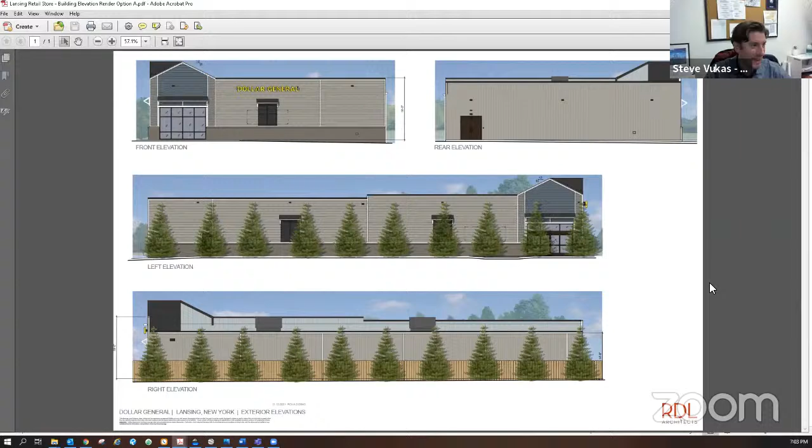Our applicant's kind of funny. They're not a big fan of the blue, they just don't want the whole main portion blue. So they can do like this corner, but not the main portion, on option A.

I don't know about the rest of you, but I've seen enough brown and tan dollar stores. I thought that was more of a gray than a blue. The brown and tan blends in with the neighborhood. It's less outstanding.

I like A. Honestly, I think blue is really pretty. Is that the one with the blue? The last one, I'm gonna go to C and then I'm gonna switch back to A.

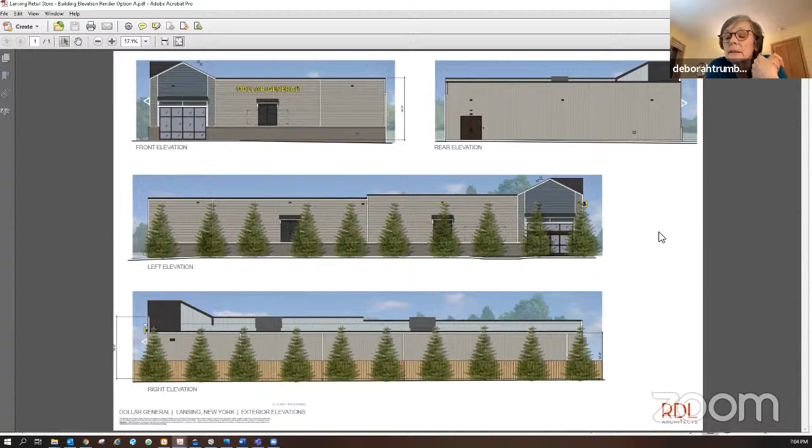So A is like the one in North Lansing. I think it's way more attractive than the tan and brown, but that's my opinion. I agree, it looks really aesthetically pleasing. And I think that's classic, it won't get old over time, compared to the other two.

Okay, sounds like majority of the members are for A. Anyone else want to speak up for or against? All right, I think A is the preference here, if that's all right. I believe that works.

Okay, anything else about the design? The site improvements, anything else, board members? Steve, is that supposed to be indicative of what the screening will look like on the roof?

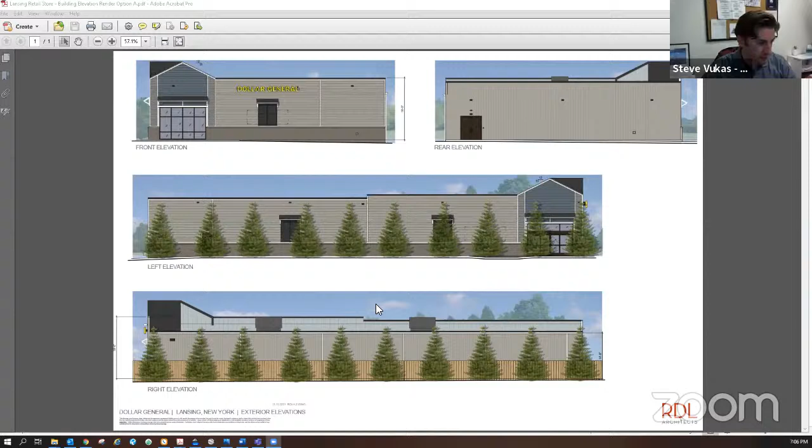Let me share my screen again, I'll show you. So this was option A, this is without the screens. You can see, I don't know if you can see my cursor, that's the HVAC units. I didn't update, or the architects didn't update option A, but I'll show you in option B and C the screening - they extend the panels up to just block those top units.

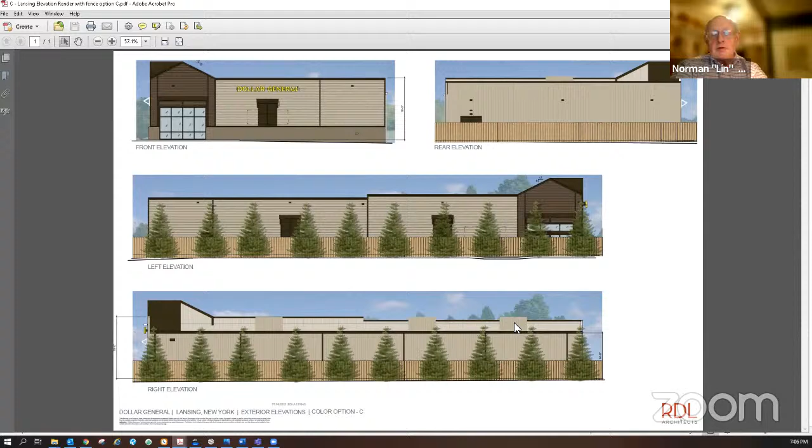So looking at it from the side, you can look behind the panel. Possibly, yeah, I don't know how much wider it extends past it to the left or the right of it. You're gonna have to be in somebody else's backyard to see it. Yeah, up the hill.

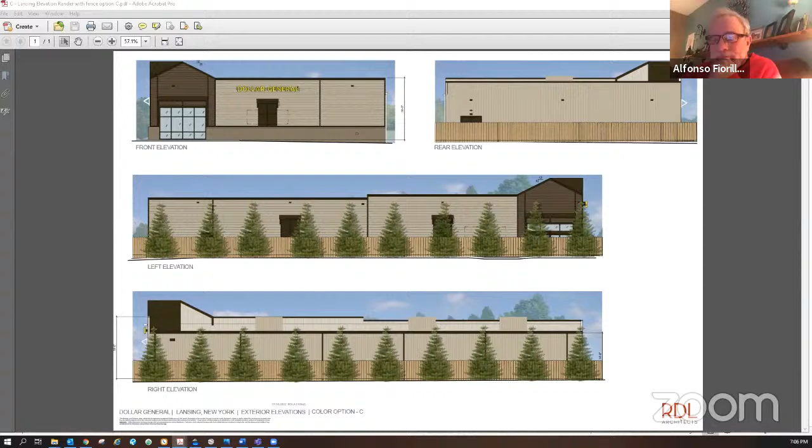Anything else? All right, I think at the last meeting there was a conversation between the short form and the long form. Did everyone have the opportunity to read all the comments that came in between then and now, hopefully?

Let's see a show of hands then, who feels that the short form is adequate for the needs here? Anyone feel the long form is better? Anyone abstain? Okay, I believe the board believes that the short form is adequate. CJ believes that as well.

All right, CJ, next, where were you at on this? That's it, it's an unlisted action, so yeah, short form. Happy to put that up on the screen for the board to go over together. It's preferred.

Okay, do you want me to go ahead and read that then? We'll go over this, members? Okay, will the proposed action create a material conflict with an adopted land use plan or zoning regulations? No or small impact, moderate or large impact?

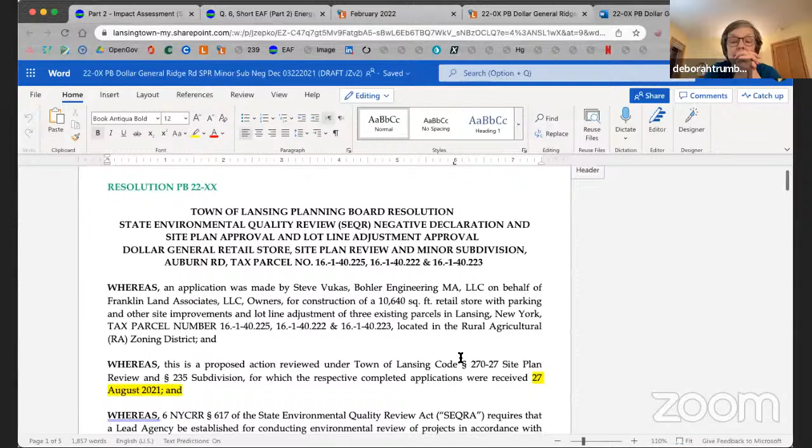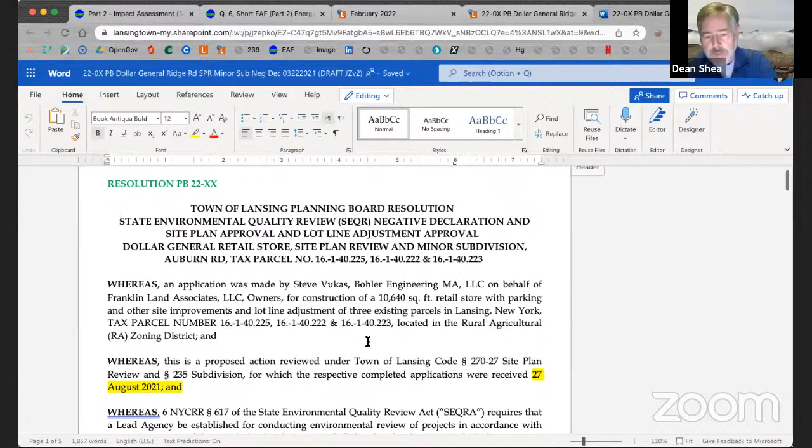Okay, and you should all have a paper copy. So Dean, did you have specific questions on this? No, since I didn't pick up my packet, I was hoping to just do it all by computer. I just wanted to make sure that all of the conditions that we want are in the resolution.

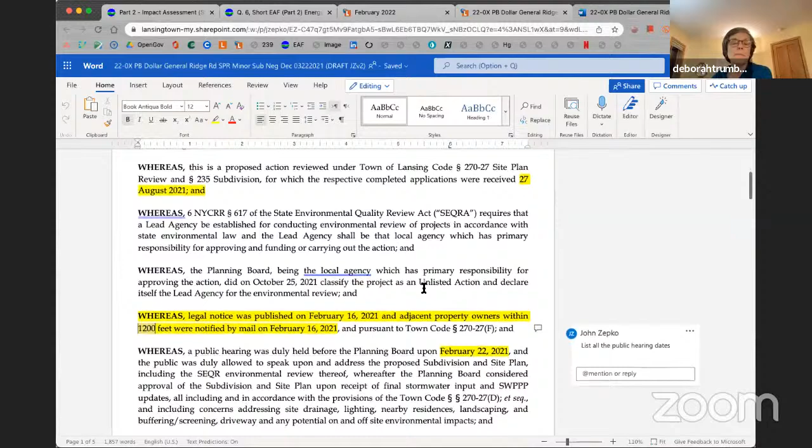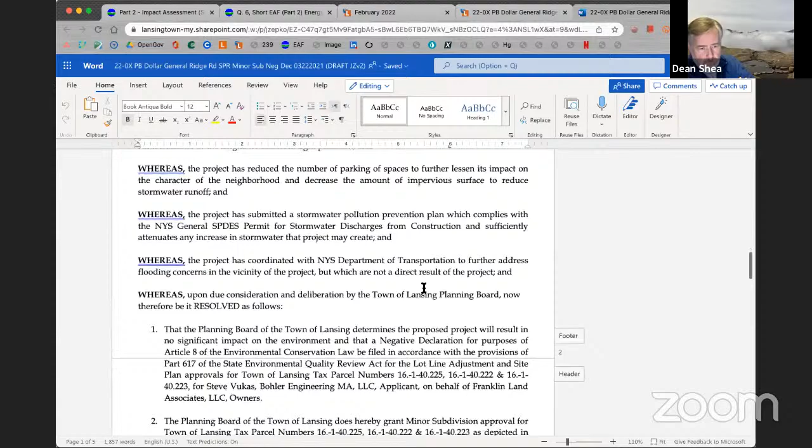Particularly the hours that the external lighting and the sign will be turned off. I think that's in there somewhere, isn't it? Just to be clear, that was option A again, was that correct? Just want to make sure I note that, the color scheme, yes. Okay, yes, thank you. Make sure I pass that on to John.

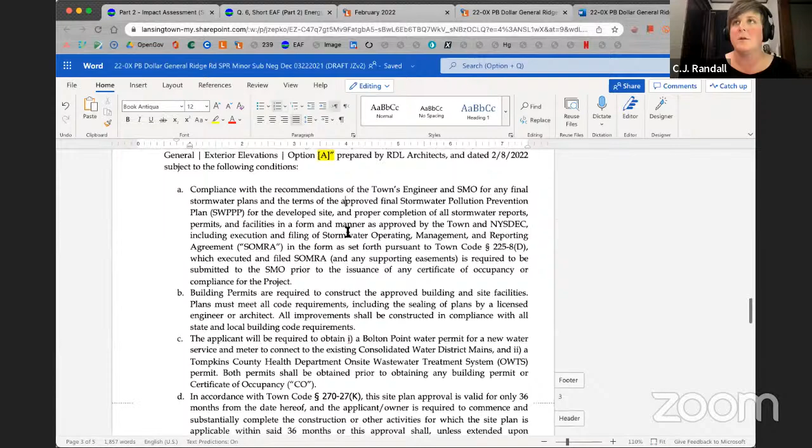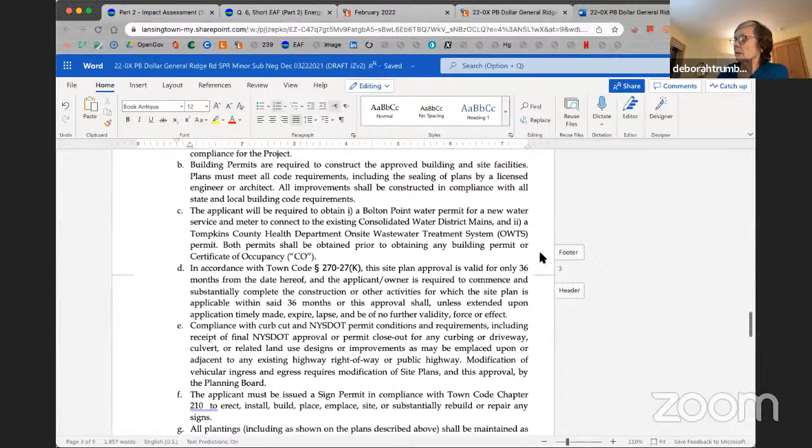Okay, so here are the conditions: stormwater, curb cuts, sign permit, onsite wastewater, lighting fixtures, dark sky. I don't see hours on here. Yeah, that's why I brought it up. Good one, Larry. Thought I saw it somewhere, darn it. It's letter H, it talks about lighting.

Yeah, but we're looking for times that the signage and lights will be shut down. Yeah, I don't see that. I just meant that the only thing I see referencing the light is letter H. Sorry, I'm not familiar with the prior conversations with the applicant. Okay, the agreement was that, and the applicant can correct me if I'm wrong, the exterior lighting and the signs - did we discuss interior lighting too, folks? But at least the exterior lighting and the signs would be turned off a half hour after the store closed. Right, yeah, I remember that's right, Mr. Sharpsteen.

Okay, so CJ, can we add that to this resolution? Yes, of course, let me just incorporate that.

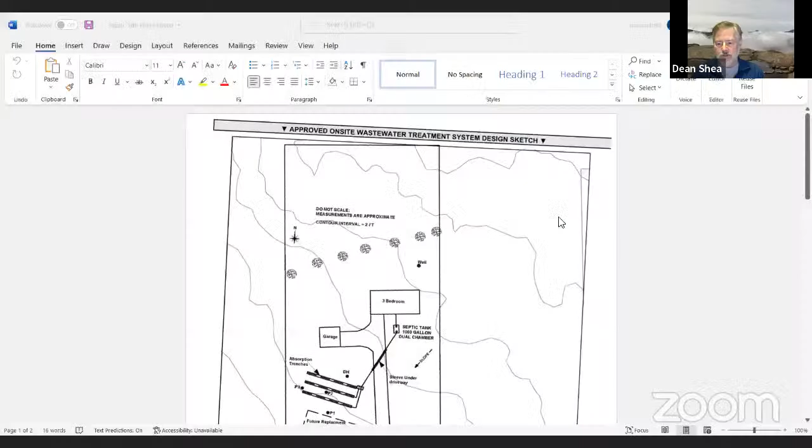The way it's showing here, where it shows the garage on the county's drawing, that actually is the shop itself. Now what's happening is the septic is moving to the right a little bit so it avoids that, and the drive. This is very early on when we talked with them; now we have everything mapped out in more detail.

If you're looking at the other drawing, it is to the east more. And this driveway, if you can see with my cursor, is actually moved over as well, over to here. Does that make sense?

Will that driveway serve both the house and the shop? Yes, the one that's on the drawing right now is, like I said, an accessory one. This one will serve both, as the permanent driveway once we have the house up.

Will your shop have water to it as well? Yes it will. Will it have a bathroom, that type of thing? It will not actually have a bathroom, it will just have a sink and like a tub for cleaning. But it will not have septic or sewage, no. Okay, and it's got to go someplace out of that sink.

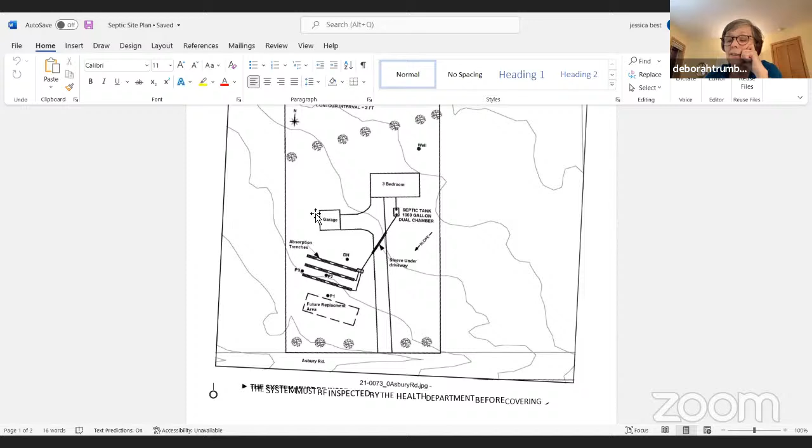Are there any chemical processes? No. You buy a plastic fish and then just paint it? Basically, it's not plastic, it's like ceramic. Composite? Yeah.

Like when people build statues or pottery, it's the same idea, it's just a fish. Is it resin rather than actual ceramic? It is resin, yes. And you don't do the molding on site? No, we have not done that.

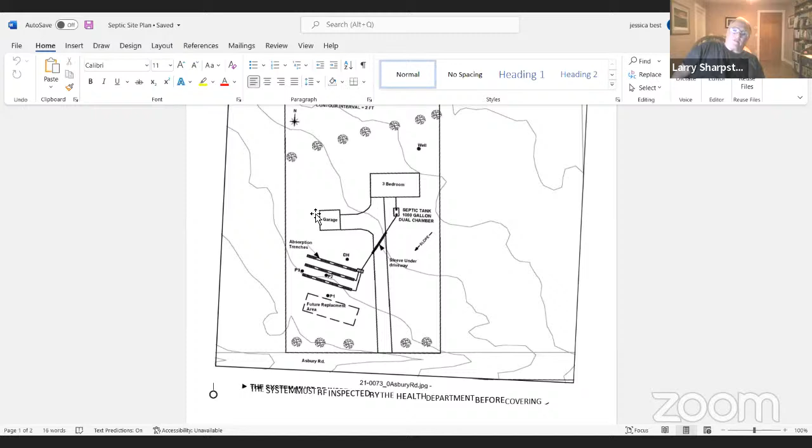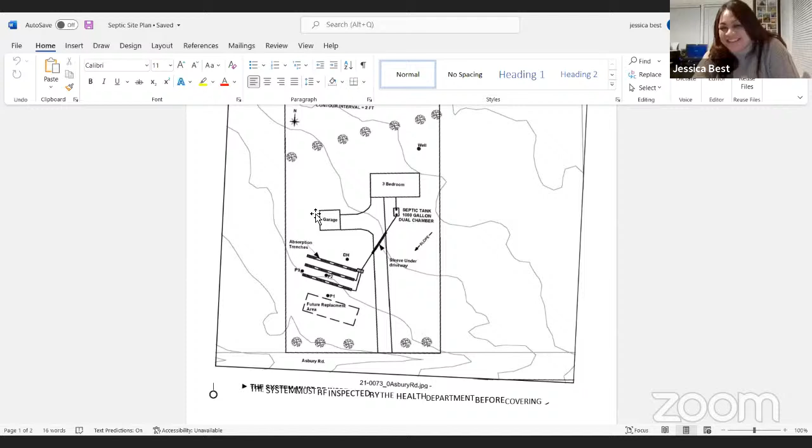Al, you were asking for comments. It sounds like a very low impact, low noise type of business. That's more like an art business than anything we've had come up in front of us in a long time, like a studio idea. As long as it doesn't involve big mouth Billy Bass, we're good to go. Is that the singing one? Yeah, it is. Definitely not.

Okay, CJ, we're looking for a motion then for this resolution, unless there's any other questions. So moved. Second.

Heather, can you do a roll call on this? Yes. Tom, yes. Sandy, yes. Lynn, yes. Dean, yes. Deb, yes. Larry, yes. And Al, yes.

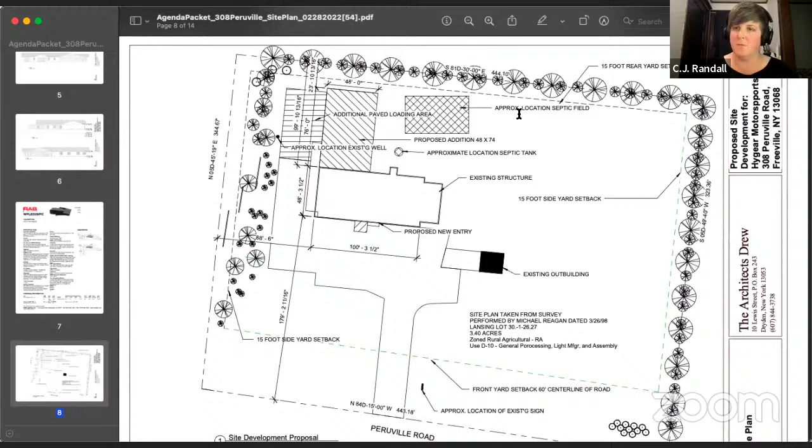Oh, I see, the septic system is east of the proposed addition. Correct. What I was meaning was extending the existing structure to the east. No, actually, they do not want to do that. They wanted to continue - right now the shipping is on the west side of the building, and this keeps the manufacturing and shipping on the west side. The east side of the building right now is mostly all offices, intermingled with some of their shipping processes that have taken over that space. So right now, if you drew a line through the building right where the addition goes, from that line to the west is pretty much all manufacturing and shipping, and to the east is all the office type space. So for them to put the addition to the east would mean they'd have to rearrange all of their shipping and manufacturing around the offices, and that would really- Understood.

So this area is mostly going to be shipping, receiving, warehouse. Is that correct? There will be manufacturing in there as well. They do some small parts manufacturing there, and they need more room for those pieces of equipment.

Similar height to the existing building? We're looking at going up to a total of 12 feet in height on the exterior wall, so we can get a slightly larger overhead door in than the current one. But we are going to match the roof ridge height, so we're not going to go above that, so that won't provide any other feature to the south of the facility.

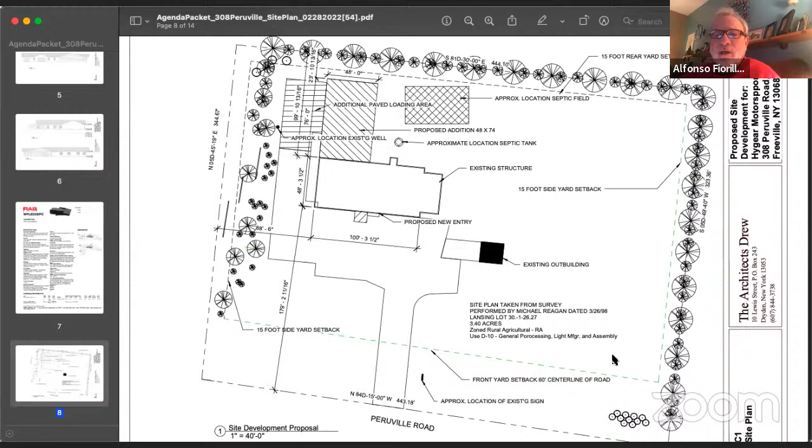So CJ, you said this is just information stage today? Yeah, I believe included in your packet was a declaration of lead agency as well, just to get that SEQR review process going. Thanks for that reminder. So what do we do on this resolution?

I move the resolution for lead agency. Second, modify the name on the document. Is this something, show of hands or roll call? Roll call. Roll call, but I didn't catch who was second. I did, thank you. Okay, Tom, yes. Sandy, yes. Lynn, yes. Larry, yes. Dean, yes. Deb, yes. And Al, yes.

Okay, I think we're set for tonight on this, unless anyone else has a comment or question. If I may, Al? Yes, sir.

One of the major concerns about the original siting of this business in that location was exactly that, noise and traffic. I have not heard any complaints from anybody. I don't know if CJ's office has heard any complaints since the business originally located there. So it seems to me that they've established that they're a pretty good neighbor in the area.

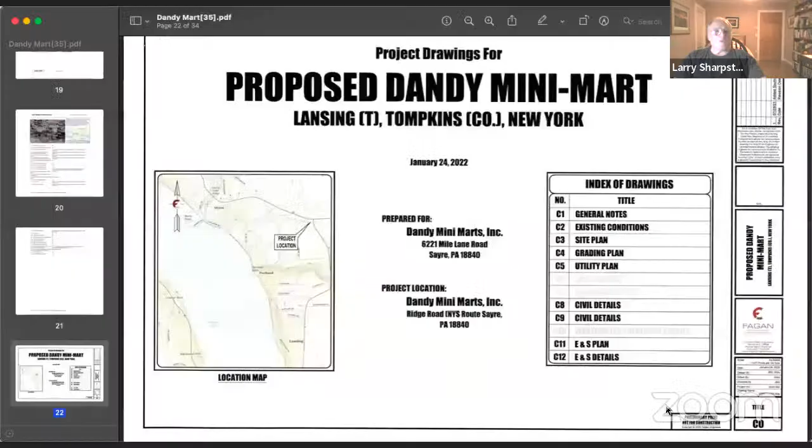Well, CJ, you said that... I think I'd like to look at the site plan, because the last time they came to us, we gave them some pretty good ideas on what we were looking for. And based on what I've been able to see off this excellent technical tool that we have, I don't think they paid a whole lot of attention to what we told them. I agree. Nope, they didn't. They didn't. No, that's certainly not what we envisioned.

Okay, so I guess we know where we're going to be starting, don't we? Well, I think we need to first tackle the major items. That's the location on the site of the store and the gas pumps. Another item is the ingress egress traffic pattern on the site. And probably the third most important item is the compatibility of the design of the improvements to the neighborhood and to Rogues Harbor.

Yeah, I don't know if there's a landscape plan involved or not, but they need one. Yeah, we definitely first need one. Off, the question is, does the planning board, would they like to see the store closer to the intersection and the gas pumps to the rear of the site? Absolutely. That's what we told them.

Yes. So, I don't want to see a bunch of parking out front either. Yeah, I mean, when I say out front, I mean by the intersection. Yeah, I think maybe we should just generalize to the developer again what our overall thoughts are in regards to the location of the pumps, the store, and then traffic pattern. And again, I think what's really paramount is the compatibility of the design of the whole site and fitting it into the historic nature of the building across the road.

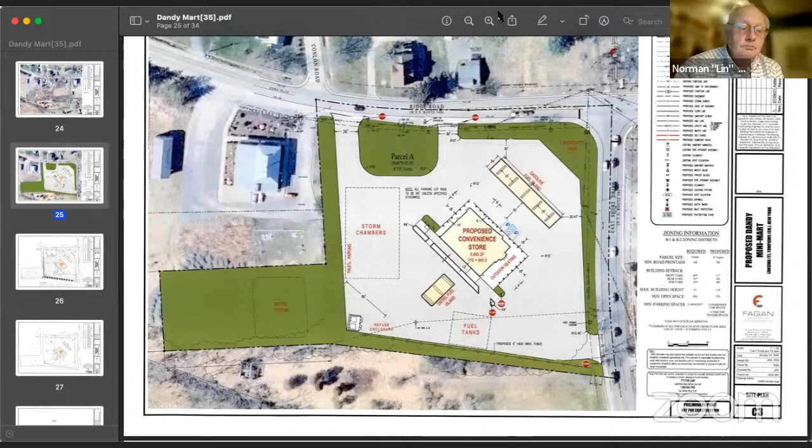Hello, this is Jamie Gensel, Fagan. How's it going? Hi James. So yeah, we do have a number of things to discuss, and I appreciate you taking the time. We understand it's a concept in front of you again, but we do want to jump back into it and then give you a full submission for the next meeting.

Would you like me to share a screen then? Do you have changes? Well, I have more of the building and the canopy, which will put this more in context - I think that's probably the better thing. Let me bring that up. It's going to let me share now. Yep, there it is.

So just so you know, the landscaping plan's not on here yet so we can see everything. As we submit the next step, the landscaping plan will be added. We're going through the Cornell Cooperative Extension list of native plants - there's also the Finger Lakes native plants list as well. So we'll have a full landscaping plan as part of the next submission, but for the point of view of seeing what structures are there, that's why we have what we've got.

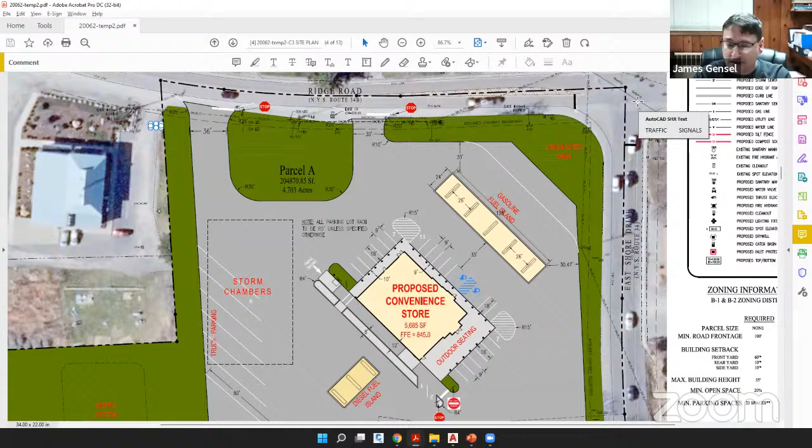Now, to be honest, we don't know if DOT would actually allow for the 2 drives. We've submitted the request in, but that has to go through their process. We've done the initial stage 1 application. We have not received any commentary back yet.

But the idea was to keep those tractor trailers away from that intersection. And if we need to sign these to be truck entrance only or what have you, we can do that with this item. May I make a comment?

As somebody that knows the property pretty well, I really think that you're asking for and causing a lot of trouble by having 2 entrances on the north side. 2 times a day, at least, there's a terrific amount of traffic through that intersection, which you're not necessarily seeing with the bridge currently closed.

Yeah, and I think that the optimum for this would be just 1 opening on the north side and 1 opening on the east side. But then again, what do I know?

Well, no, you're right. Just to give you a little of my background, I live in Elmira, and 90% of my family's in Auburn. I drive this road. I've actually driven this road since I was a kid, my parents driving me up through here. So I do understand that.

That's one of the concerns why I recommended this, actually, just because I wanted to keep as many people away from that intersection as possible. If the only negative to that is the potential of that becoming a cut through, that's the one thing I did bring up during the review process.

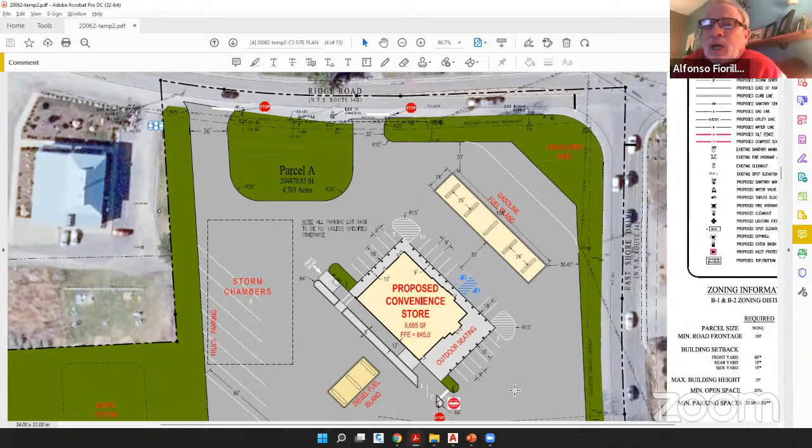Well, Jamie, can I ask you a question on that? Jamie, if I'm traveling from the school to the light and I'm going to turn right, head back to Ithaca, most people are making an illegal turn on that road because there's no turning lane.

Likewise, if I'm heading from Ithaca, I go to the light and I'm going to head east to, say, Auburn, there's no turning lane there either on the right. Yet most people move over and turn illegally.

Did the DOT talk about adding turning lanes there? That probably will become a discussion about how to do the striping and such. I do want to talk about that a little bit with them, but we have to get through stage 1 first. But if you guys do have any recommendations along those lines, when we're talking to them, I'd be glad to present.

I definitely think that there's a need for a turning lane in both situations. Now, whether there's enough state land to put in an additional lane, I don't know. In other words, while we're considering this, the question is, would you be willing to donate another 5 feet or 10 feet if that's necessary to get those turning lanes in?

Well, I think there might actually be sufficient asphalt out there, because it kind of works that way now, doesn't it? I guess that's something we can ask Dwayne, he's actually on the line as well. But I think it's because way back when there wasn't a traffic light.

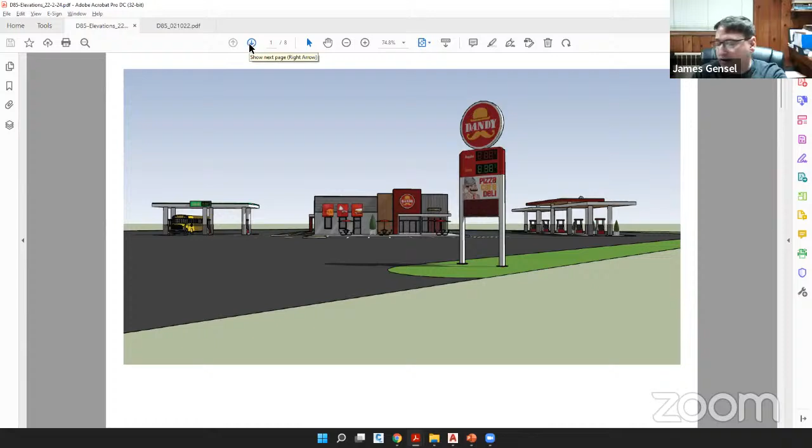Something I really did want to show you is that the Dandy people are very cognizant that you guys really did not want to see a traditional canopy. So they've taken another approach to find the minimal canopy, the least footprint visually, to do the canopy over the islands. They came up with this plan, which I think is the first time they've ever used it. This is a brand new idea, a very minimal piece, so you can see the building better. The building's more the attraction. People know it's a gas canopy that protects people from the weather, but it's a little less than the traditional Sunoco-branded type canopy. That's been the latest approach they found to work.

I guess, Dwayne, this would be the first site for this canopy type, correct? It's nothing we've ever built in the past, and at this point we're still evaluating details. The cladding you see on the bottom would likely be stone or some material, again trying to break up the metal and the columns needed to support this type of structure.

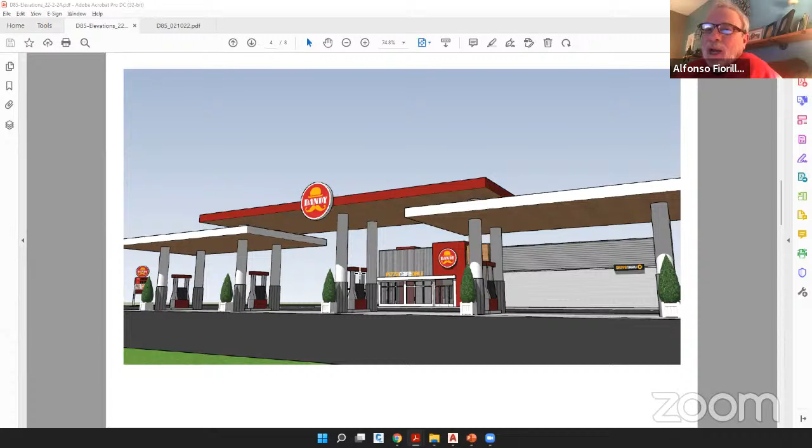I'm still having a problem understanding why you can't swap the store and the canopy, move the store closer to the intersection. From the point of view of conflicts with the drive-through and the canopy itself and the diesel, if we moved this over, you'd have people walking across the drive-through all the time. Unless we put the drive-through in the front, which we thought was actually a worse case.

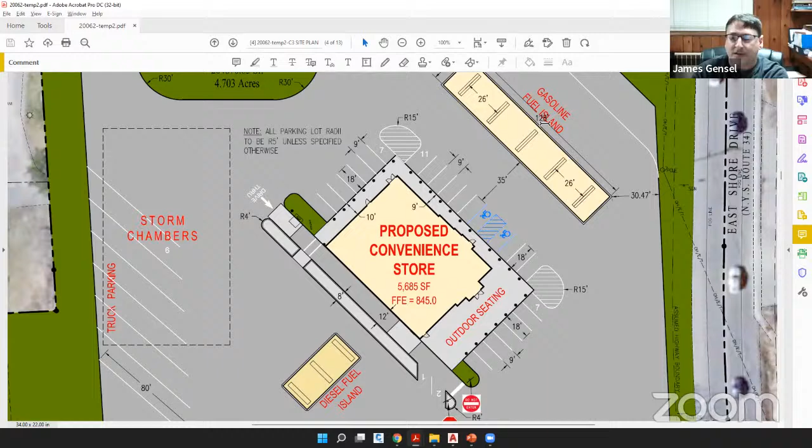Okay, so I see that. I understand now what you're saying, that if the drive-through was there, they would have to cross the drive-through to get to the store from the fuel island. Right. And then you also need to have some parking, so optimally, if someone fills up, they pull forward and park before going into the convenience store, so we can allow another person to get into the gas island. Too many of us just leave our cars there, but that's really optimal thinking. That's what we hope, but it doesn't usually work.

Do you envision trucks spending the night there, or?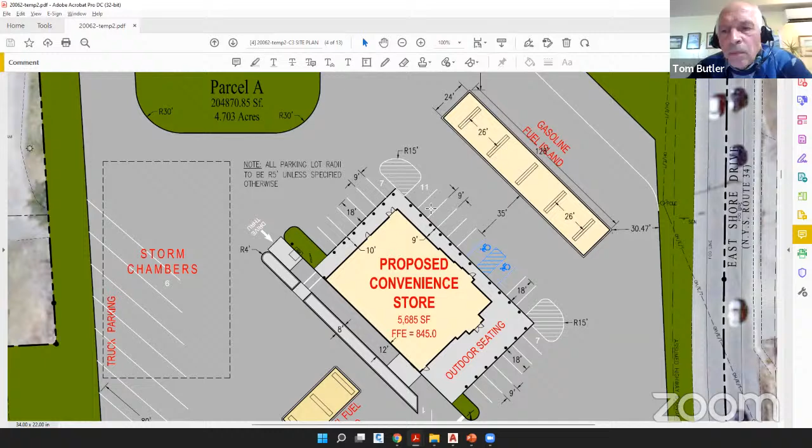No, I'm sorry, this isn't a truck stop. This isn't going to have showers or anything like that. It's not a Pilot or Flying J or that kind of thing. This is mainly fueling and then move along. The parking spaces are mainly for convenience, so people can come in, sit down, eat, and then go forward. But no, not an overnight truck stop type.

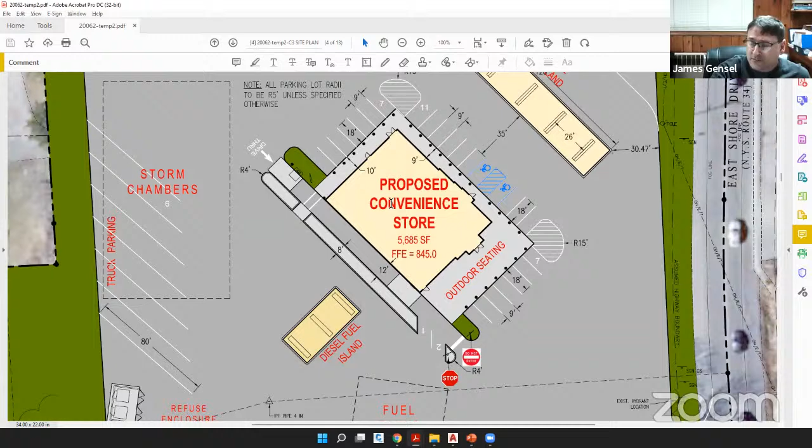So is there enough room if they're coming from, say, the salt company and turning into that first entrance? Off of Ridge Road, yeah, they're coming down Ridge, taking a right in, and they want to park. Is there enough room there to make that turn?

Yeah, we've actually done truck movement diagrams. We could provide all that too as part of the application. Yeah, I think we'd like to see that if we could, please, if you have the traffic pattern on the site.

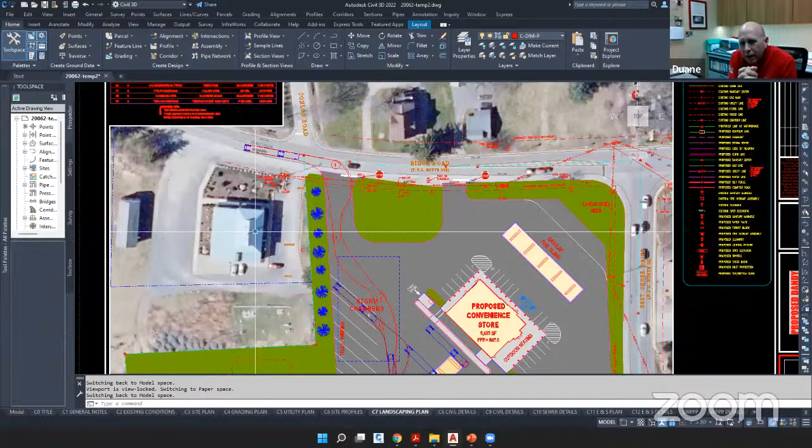It's not always necessarily trucks, it can be people pulling a boat. We have people pulling recreational vehicles, campers. Our feeling for diesel at our locations is geared towards that segment of the population as much as it is someone driving a tractor trailer or a diesel truck.

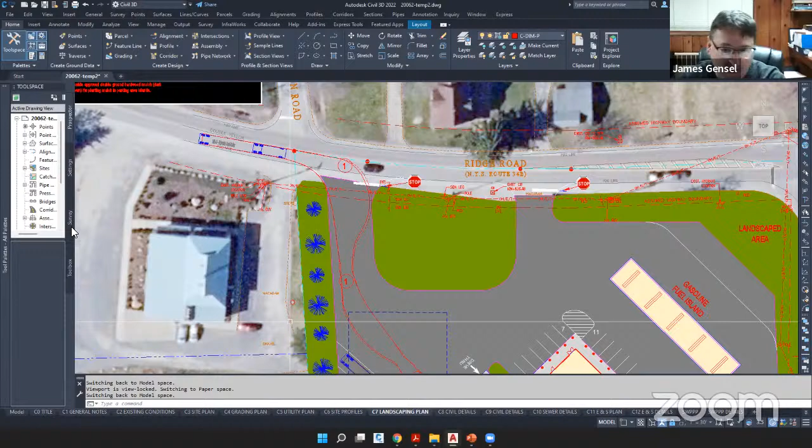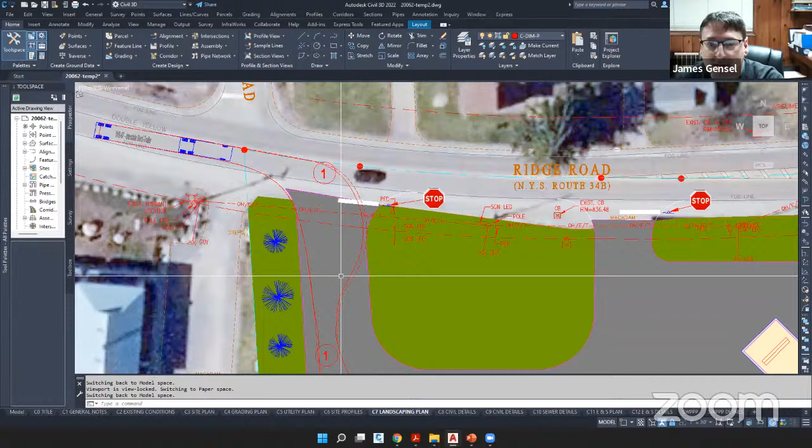So this is my CAD file, just showing you what we work with. This is the start of the landscaping plan, don't get stuck on that. But for the tractor trailer, if it came in through here, this is why we had to go 36 foot wide. The solid line is actually the tire, and the dash line is the nose of the vehicle, so you can see that's the minimum for the driveway itself.

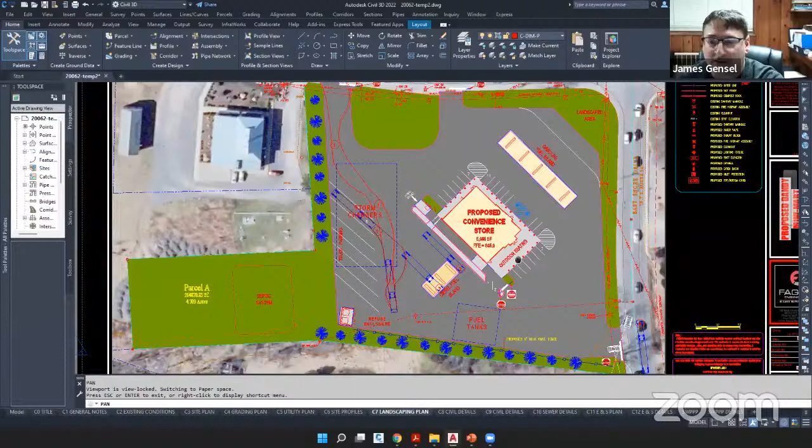Then if they pull forward, they could back in, same thing here, pull forward and back in. This is one of the things Duane makes sure I do, show that it works. He doesn't want to build something that doesn't work. We do a lot of these, you'll see cars, this is just one of the models, we've probably done 10 or 15 just to show different directions, what happens if the tractor trailer goes around this corner and gets stuck, kind of thing.

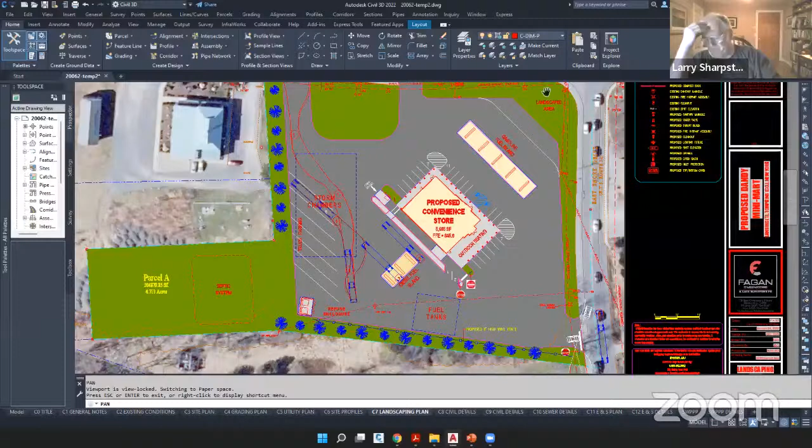What about charging stations? Oh, I'm glad you asked, let me pull that back up. So there'll be charging stations on the backside. Here's where the drive-through would be, and this would be the backside. I have to do the green striping on my drawing, but this is where we determined to place them.

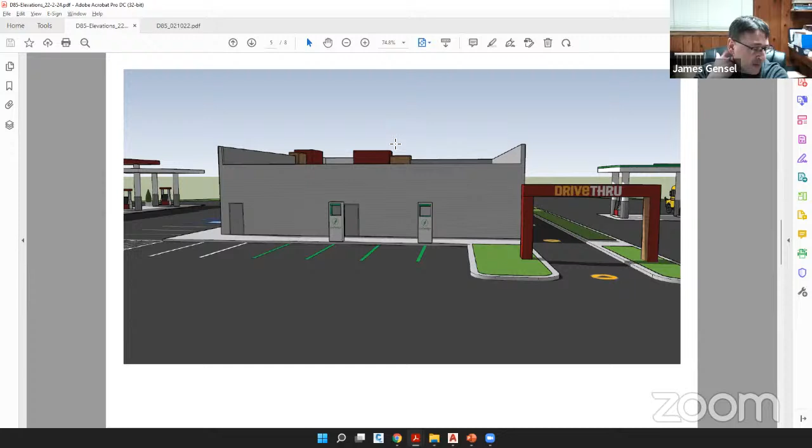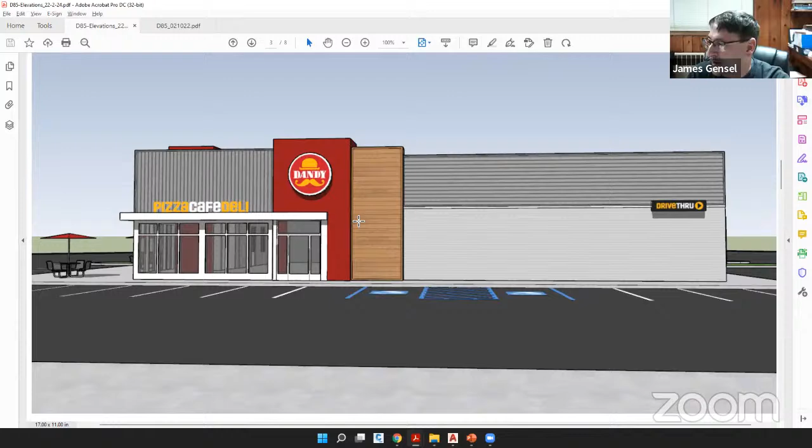What are you thinking on the materials on the exterior of the main building? I'll let Duane go through the materials, but this is the cladding you see right now. We use a number of different textures — corrugated metal, obviously, and I believe this rendition has Hardie siding. The red material and the brown are materials made by Nichiha, also a fiber-based product for longevity.

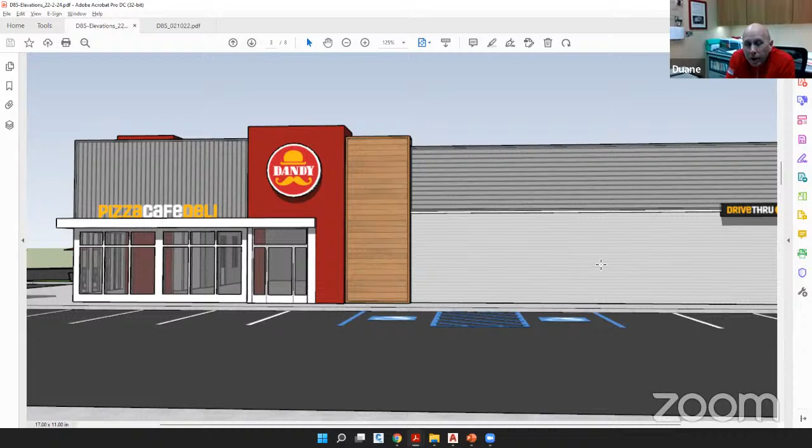And what's the light gray, is that an imitation stone or brick? That light gray is, I believe, a Hardie cement board.

Have you done any other designs with different colors? I just think the red and the yellow are pretty stark and, to me, not very attractive, no offense. I just don't think it's, I mean, if I were going to go to Rogues Harbor and have dinner in a historic building, that'd be hard to look at during my meal. I wonder, are you able to present other colors to the board, or can you share any other designs you've done? Or do you typically stick with this signature red and yellow? We try and vary the roof lines. What do you see in the area that makes you believe this type of structure is anywhere near compatible with what's around it?

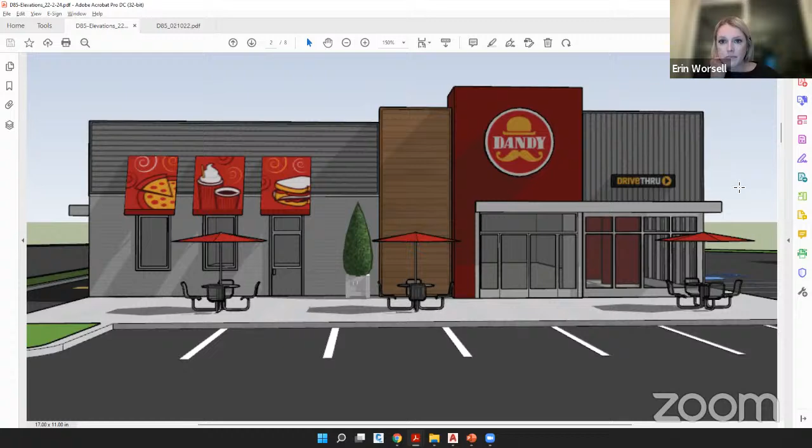I'm honestly still really concerned about the traffic. I frequent Conlin Road a lot, and it's really tricky to get to work every morning and in the afternoon. I just see those two entrances as really problematic. It's already a problem without this structure, and it hasn't been remedied. I think this is going to further impact all the residents trying to get through this section of Lansing.

So typically this type of use is what you call pass-by use. It's not going to be a destination that generates any more traffic, but it will utilize the existing traffic. Those people already on that road traveling will be utilizing it.

That's another reason why we put these drives as far as possible, investing in buying more land to move as far away from that intersection as possible. With that drive, it does increase their cost, not my money, from buying additional land but also paving extra pavement to get to that entrance. If they were able to come up closer, that would be a much bigger traffic issue. That's part of the reason the applicant went into negotiations to get that other piece of land, and part of the rationale on the timing of what's taken us a little while to get back to you.

I think you missed our point. None of us are suggesting that you bring either of those driveways closer to the intersection. We like them as far away from the intersection as possible, and that's personally why I don't like the middle driveway on the north side.

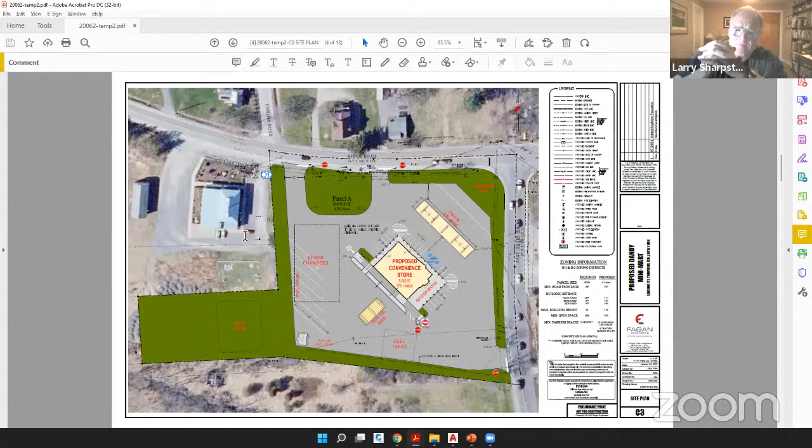Yeah, exactly, Larry. When I say substantial, I don't mean 6 feet high, I mean 12 or 14. We're actually, to be honest, well above them.

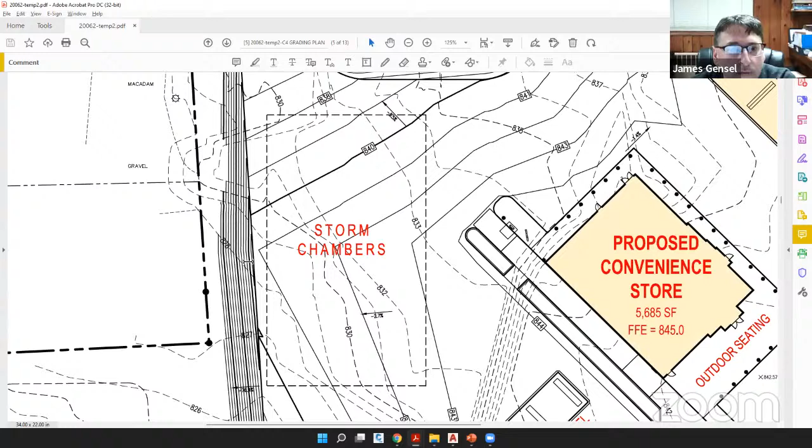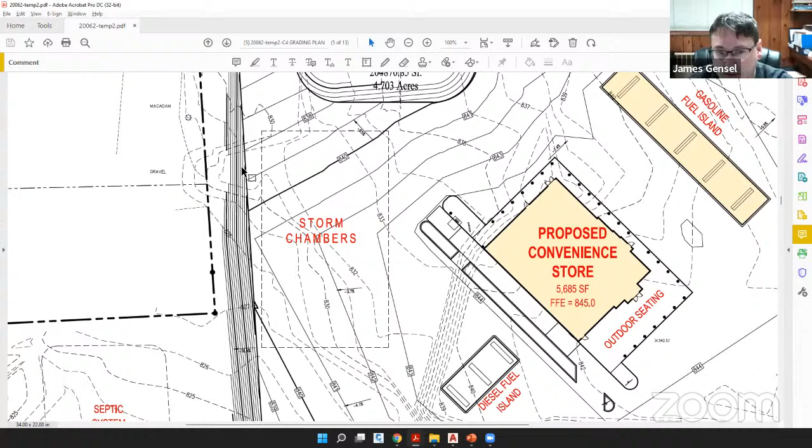Yeah, there would have to be a fence along that west line between the daycare center and the entrance and the parking. This elevation where the trucks would actually park is approximately 12 feet above this elevation, so I would put the fence line actually on the top. That adds additional buffer, and then put the landscaping on the lower end, is what I would recommend, though that'd be up to you. So there would actually be no way they would see the trucks from the lower end, just because from a visibility point of view, you have a 10 to 12 foot slope and then a fence on top of that.

Larry, correct me if I'm wrong, but that building that has the daycare in it, didn't that used to be a fire hall? It used to be a fire station, and when it was reimagined, they did keep a traditional roof line on it so it wasn't out of step with the houses and the Rogues Harbor Hotel. I was going to say the touchstones that are very close by would be that structure and Rogues Harbor, and the proposed look of the convenience store, with flat roofs and what you're talking about for exterior cladding, really clashes with the neighborhood, but especially with Rogues Harbor.

Just so you know, we're not just standing here spouting off what we think looks nice. Between Dean and I, we have over 80 years of experience in construction. You're talking to people that have built for a long time.

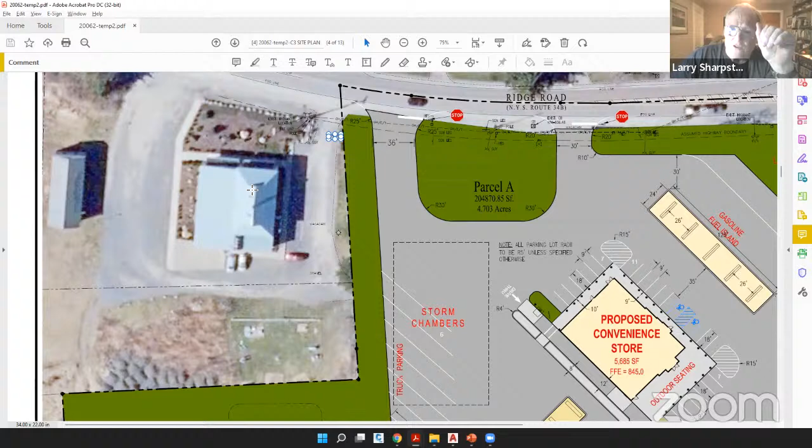I've got to get this out of the way: the design of the building and the positioning of the building on the site are completely unacceptable, because they don't fit in with the rest of the area and don't follow the concerns of the community with regard to traffic. I know you may think you've done the best you can with a tough situation, and I realize it is tough. But you've got to remember there are people who want their town to look a little better than this. You can be proud of your work, but there are going to be people who don't care for it, and unfortunately right now I'm one of them.

Can I add to the traffic issue? It's not so much that there's going to be an increase in the amount of traffic, it's that the patterns are going to be very different. You drive down Trip Hammer where people are coming out of the McDonald's takeout, and you risk your life because they're coming out eating, trying to get out of the driveway and onto the road. It makes for a very confusing traffic pattern.

And then the signage—I don't think it complies with any of the sign laws that Lansing has. I think we could go a long way straightening out the traffic. I think it's a lot easier to have your store maybe mimic the lines of the Rogues Harbor, with whatever roof form, brick facing, whatever. I do believe it's a lot easier to get the store to match up than the island for the pumping of your gasoline.

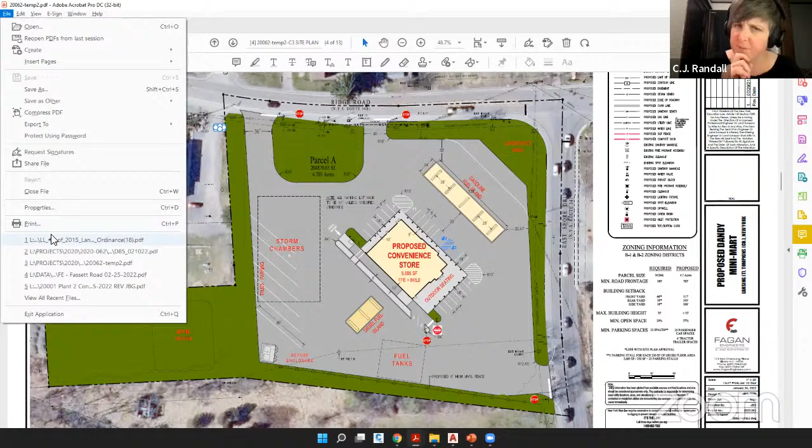May I jump in? I don't know if the zoning permits a drive-through here to begin with. I thought way back, is this B1? Yeah, that drive-through was not prohibited. May I jump in real quick—I believe the suggestion was made during the initial sketch plan about the drive-through. Is that something the planning board would now prefer not be included? Right, if it stops them from putting the canopy where it belongs, yes.

I agree, Larry. I think you make some really great points, and I'm in agreement with most of everything you're saying. We have the capability of doing some research on our own and looking at canopy and building styles done elsewhere. I've personally seen them in Pennsylvania and Virginia that have peaked roofs and don't have any resemblance to what's shown here. And yes, they do have the halon fire suppression systems. So it can be done.

We've seen it locally too—what's the new store down on South Meadow Street that has gas, Byrne Dairy? So we've seen Byrne Dairy, and we've certainly seen Stewart's shops throughout New York State—a lot more compatible with these types of small town situations than what's proposed here for the building, for sure. But if the drive-through can't be worked out to move the gasoline island away from the corner and move the building towards the corner, then it's either got to be worked out or it's just got to go.

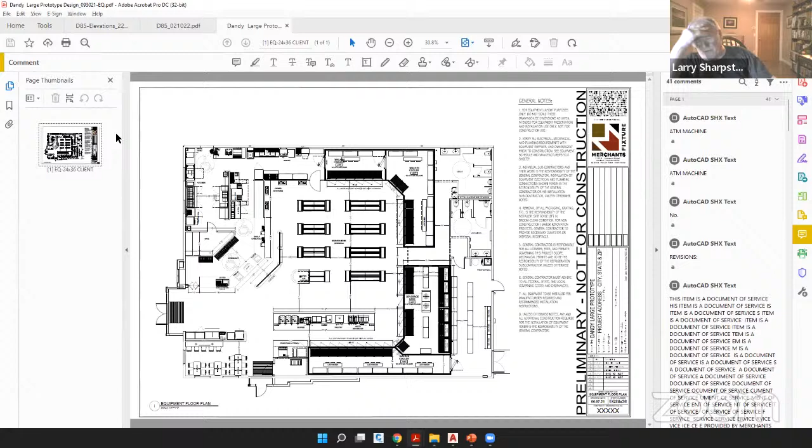I think when we were here earlier, Al, one of the things we discussed with them was having the seating with the building pushed all the way forward. The seating would be back from the road in the lawn area in the front of the corner, and that would have been away from the vehicle parking. Yeah.

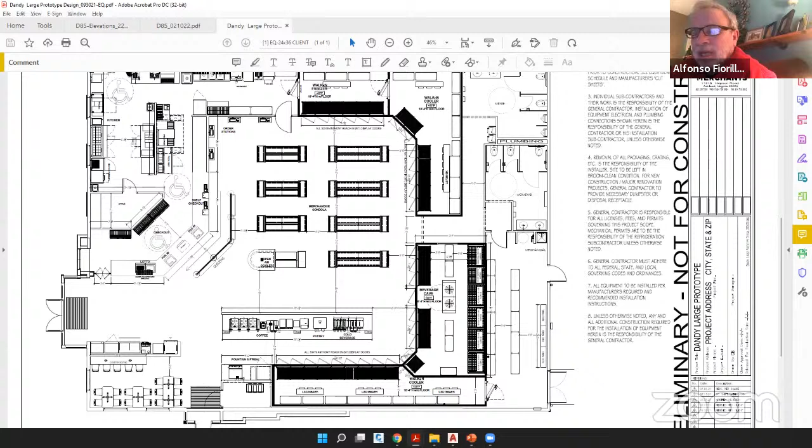I mean, Jamie, is there any other way you can take a second look at this and move that store closer to the intersection and still facilitate a drive-through?

We've played no less than 10 different scenarios trying to make the fuel offering, the store, a diesel island, and a drive-through work. This is the best option from a traffic and safety perspective for our customers that we were able to come up with.

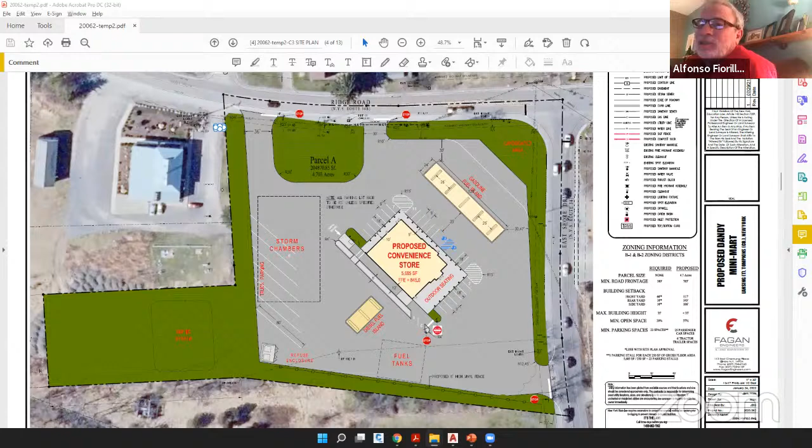When you put all that vehicle traffic on one side of your building, you're asking for a problem. Because then you're asking to conflict big vehicles with small. Yeah, and I see what you're doing and I appreciate it, but honestly, Dwayne, the community is not going to be for the way the setup is right now.

And I think many of the planning board members feel the same way. Board members, any additional comments? Did you folks even consider a brick facade for the building with peaked roofs?

I wouldn't get hung up on the colors of the building. Well, we would. From a perspective of what we're showing tonight is our latest generation of stores and the direction we're building them. That doesn't mean we aren't willing to deviate from that for communities, because we've done it.

We built a farmhouse in Hector, New York, a year ago. That's an all white building with black windows and awnings. So yeah, we're willing to look at our textures, look at the look of the building.

TJ, we have gone to this one-slope roof design just because it lends itself to a much better feel once inside the building for our customer. When we build a traditional A, you tend to end up with much lower ceilings than what our finish is in a building such as this.

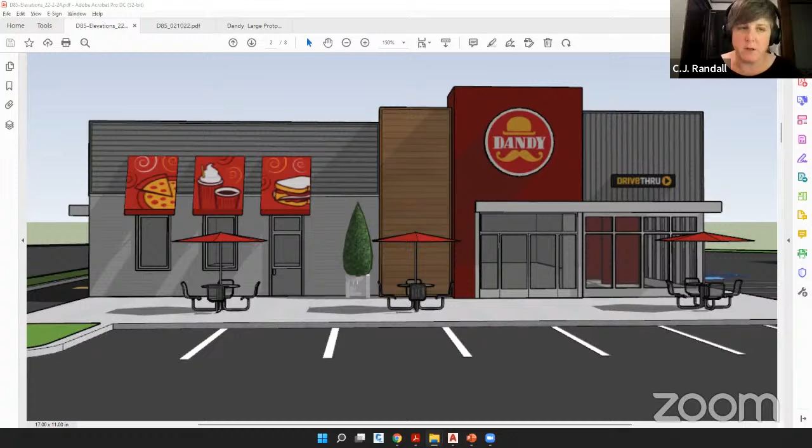Yeah, certainly, absolutely. And it sounds like there's some interest in at least examining some of the disposition of the building to be more in line with the historic building, anchoring the corner. I'm hearing that also as a possibility.

And I think maybe there's some confusion perhaps we've given to the applicant about the drive-through. I believe that was a request. So perhaps there's an alternative scenario also to consider without the drive-through facilities, if I'm hearing you all correctly.

Well, I think that was brought up during the first time they were here for the concept. And drive-through is great, but if it doesn't work in terms of what we need this site to look like, then it's potentially a no-go.

Did you look at, remember Lynn's comment on one of the earlier iterations of what was to be allowed in a B1? There was discussion on drive-throughs not being allowed.

I think to save the guys some trouble, maybe we ought to look into that too, to see if that is still in there. I'm scanning it right now. I'm actually having to translate it from graphic to text, but I'm doing that right now.

Well, so if you do have something you want to show us, that would be great. Well, I've researched that real quick. Did you have something that you wanted to share? Is that what I understood?

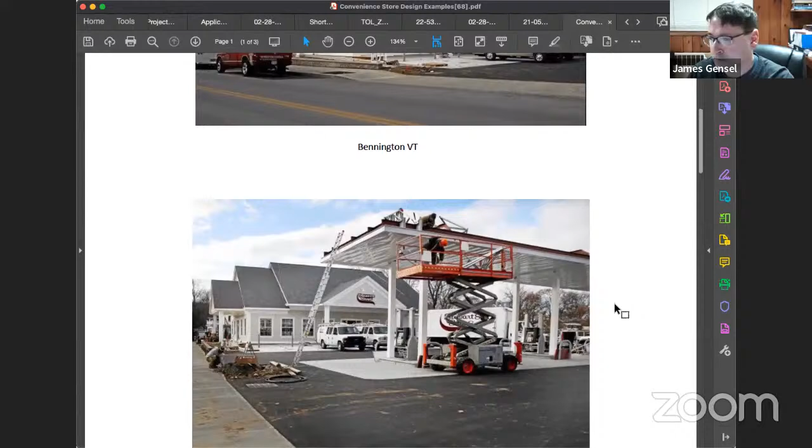And the upstairs are all fake, just faux. So the peaked roofs, that's where the air handlers are put. So the peaked roofs are the element we'd like to bring attention to, and also the cladding as well.

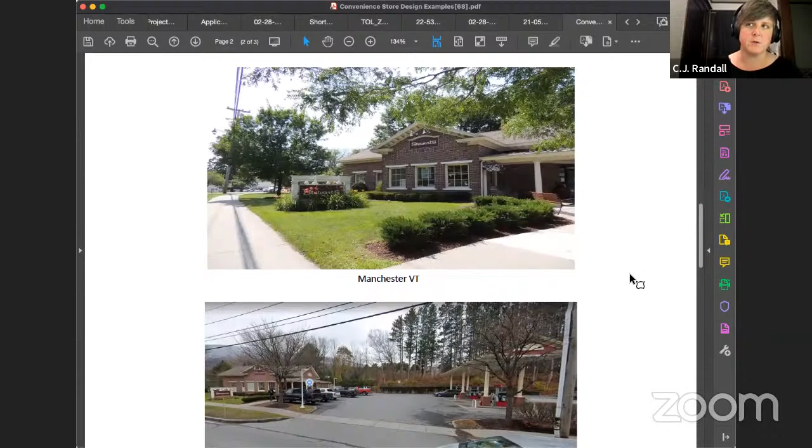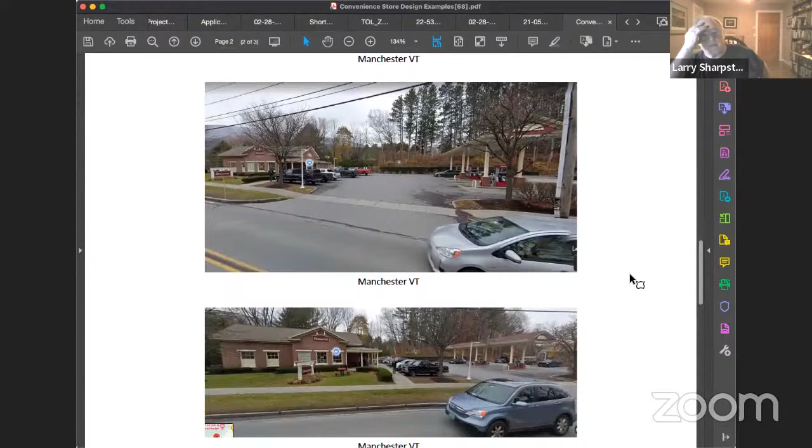Was there interest in the peak roof over the island? Yeah, and also I believe the last one. I think the island canopy should match the main building, keeping in the same style, whether it's all one peaked or part of it's peaked.

This one has a flat roof, but it's a much better representation, and then it keeps the island in the back.

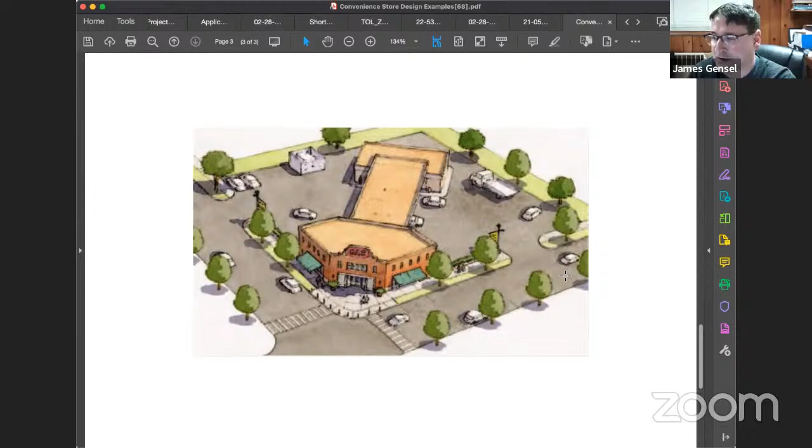I've seen this sketch before, but I've never seen one built. That's the one thing, because you'd typically see this more in maybe a downtown area.

That looks like the bank on Triphammer Road that just got built. To me, that's a pretty attractive building, the way that's laid out, with the landscaping and the road. I agree.

So am I hearing from the planning board that there would be interest in having the building not necessarily anchoring the corner if there were more attractive architectural or aesthetic elements? Is that what I'm hearing?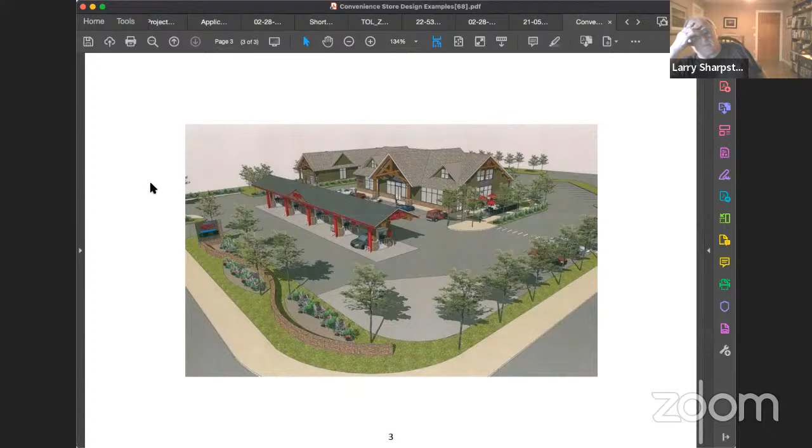That last sketch, as somebody commented, was fairly attractive, and it would appear to me that if there isn't an article in the zoning regs about not having a drive-through, a drive-through would be possible on that one, on the back side.

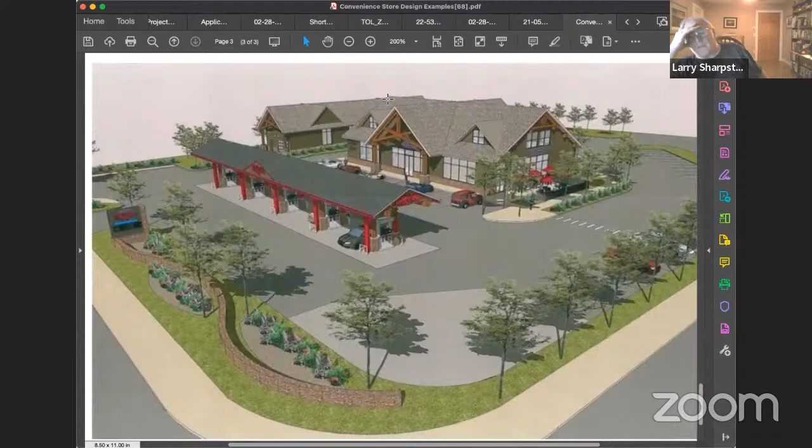So in this situation, Larry, the island and the gas pumps are located in the front of the site. Yeah, unfortunately, but the architectural design and the landscaping go a long way towards mitigating that, softening that impact.

So you're not so much saying it's an eyesore, not shoved up in the corner. You're saying if the utility has to stay the same, then we need to soften it, create more architectural positivity on the site by incorporating the peak roof over the canopy and the peak roof or textures on the building.

That's affirmative. And the landscaping, really, the sidewalk helps it.

So you're saying if the developer is forced to stay with the utility of the site, the way it lays out right now on the perspective, then the board would like to see more details such as this on the shape and the texture.

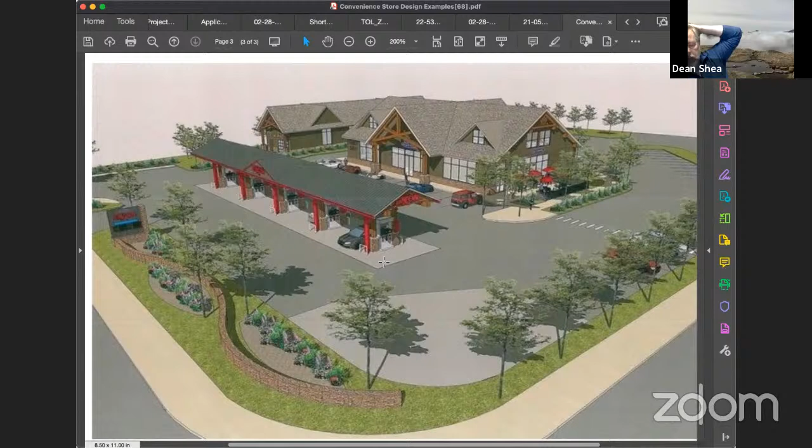Yes, I'd really like to see that, the signage too. I'd really like to see that island moved for the car fueling, if at all possible, if we can get out of the corner, even if it just has to move over to the north side and away from the historic structure to the east.

So interestingly, Jamie, is this something that has possibilities? Something like this?

That's actually more for Duane than me, but from the point of view of getting the drive-through in...

So if we rotate this building roughly 45 degrees, what's going to happen is now your drive-through would actually be pointing towards or being parallel with East Shore Drive. Or you could take that and reverse it, but either way.

So I just want to make sure I'm clear with the feedback you're giving. If I come back with our same building without a peaked roof, but with a design with textures that are much more in keeping with what you believe fits in the community, is that viable or not? Or is it all about the peaked roof?

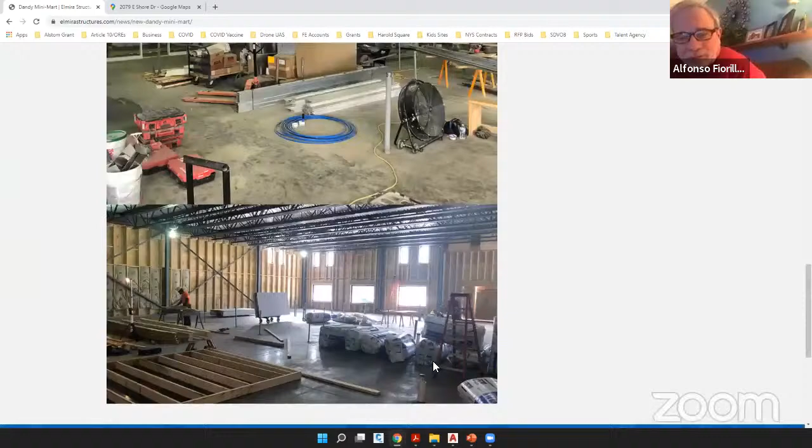I mean, that is attractive, but I think a more of a brick or fake brick type of texture, or stone, would be more compatible with a harbor. Board members, what do you think? Definitely, yeah, that's a good start, but I think we need to do a little better.

So just curious, James, looking at that building, I see that it definitely looks way different than what you had proposed. The red though, it seems like it's their signature. I'm thinking of, like, Byrne Dairy mentioned downtown, that looked kind of country, right? So that front door, could you do like a beautiful brown or something? So how far can you go, not to nitpick, but how detailed can you get?

Is that red something that can change, or is red just their color? I'll let Duane answer that. So what happens is, for instance, I work with a lot of different franchises. They each have their own key color. Byrne Dairy has their green, Dollar General has their yellow that they love.

Not anymore, not around here. Well, you got a sign, you do have it on, you approved the signage being yellow, and it's going to be brighter than what you saw on that drawing. I'll tell you that. I thought you were talking about the building colors. That's what they presented us with originally, and we didn't get that for the building colors on the latest one.

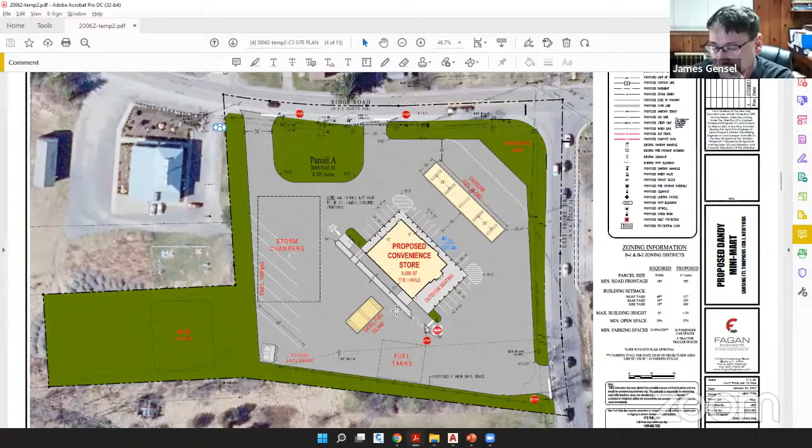As you just said, yeah, and then turn that other building so the drive-through could either be parallel to the south side of the building, also parallel to Ridge Road, but on the other side of the building, or if you prefer, parallel to East Shore Drive.

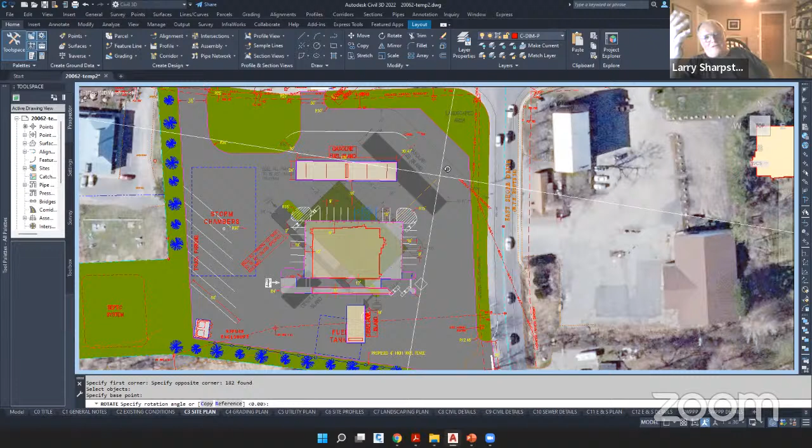But I think one of the things we're looking at here is the general appearance of the building has to be different. I think we got that. That's kind of - I'm more worried about the site plan, getting that locked in.

I think from an aesthetics point of view, we can play - I think what you heard from Duane was we can get more in line with that side of things. We're gonna have to play with it, Jamie.

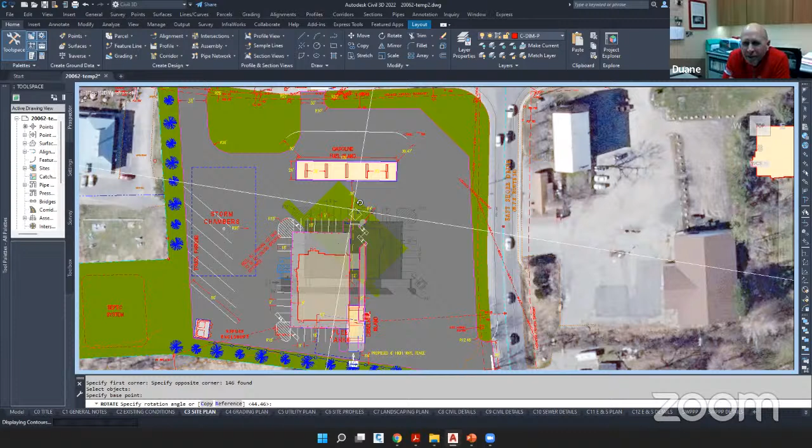I mean, we've worked this a lot, trying to get to a design that works. We aren't gonna solve it this evening. I'm afraid these people don't have all night. No, I know, I'm just messing around. I'm sorry, I forgot I'm sharing, to be honest. I'm sorry, I did not mean that.

So guys, I wouldn't try to - is it possible you could come up with a couple, 3 different scenarios without spending a lot of time and money on this?

Well, the problem we've got is we've taken so long at this point, we have a short turnaround period to get this thing closed because we're obtaining that adjacent property. There's certain timeframes on closing. So we've got to move quickly for this next meeting to have a complete package.

That's why I was kind of bugging you guys. Well, it's not like we didn't give you a good, strong hint. No, we understand. Last time, and you didn't go in that direction at all. Yeah, no, I think we got some ideas. We're gonna have to burn the midnight oil on our side to get the next submission.

Now, CJ, can you email me the one that Mr. Sharpstein mentioned, just to make sure I have it right in my head, I want to get a copy of that. Why don't you, CJ, send him all those scenarios, those 5 or 6? These were the design examples. Yes, send them all those.